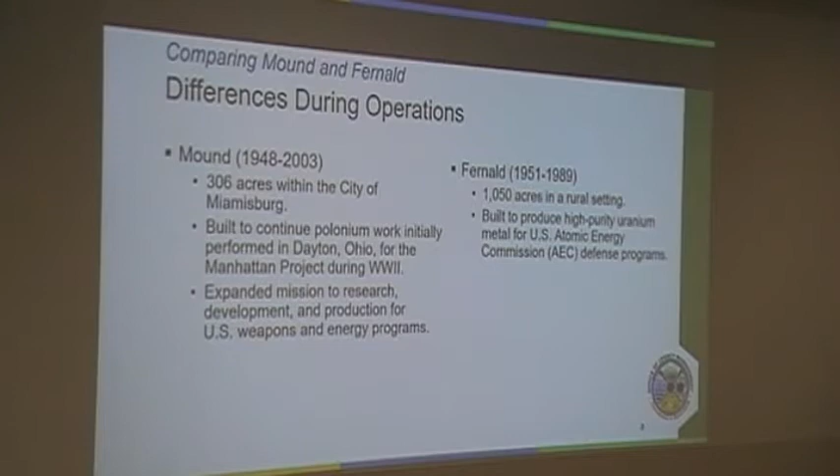Fernald operated from '51 to '89. It's over 1,000 acres, a purely rural setting, and it was a uranium foundry. There were processes to purify the uranium, and then other processes in another part of the plant to machine that metal into various shapes.

These are just aerial photos. On the left, that's Mound—here's the Great Miami River, and the purple is the Mound site. Here's Fernald, and in this photo, this is also the Great Miami River. So both sites actually sit over the same aquifer, called the Great Miami River Buried Valley Aquifer.

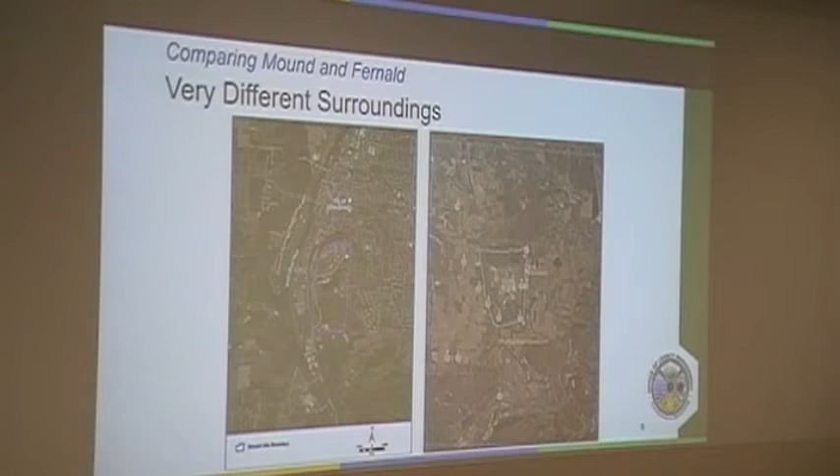During peak operations, there were about 2,500 people who worked here. I remember sometimes you got the last spot in the lower parking lot. Now, what I don't know about Mound is if there were multiple shifts run here—were there multiple shifts? Occasionally, I think, though I don't believe it was standard; there were occasional periods. So 2,500 at the peak, which I believe was around 1988.

This is a shot of Fernald, which at its peak had 3,000 employees, and they were running 24/7—so that would have been 3 shifts.

Back in the 1970s is when the U.S. Environmental Protection Agency was formed. Recall that the first Earth Day was in 1970, and Ohio EPA was formed a couple years after U.S. EPA. Congress passed the Comprehensive Environmental Response Compensation and Liability Act, CERCLA, also known as Superfund, in 1980. The U.S. EPA then created the Superfund National Priority List.

Both Mound and Fernald were put on that NPL list. What that did is give EPA the authority—if they can find the responsible party who contaminated the site—to clean it up. There's a huge public involvement process in CERCLA, and a neat thing about it is that sites are cleaned up to a beneficial reuse: some kind of end state that the local community and stakeholders agree makes sense for the site.

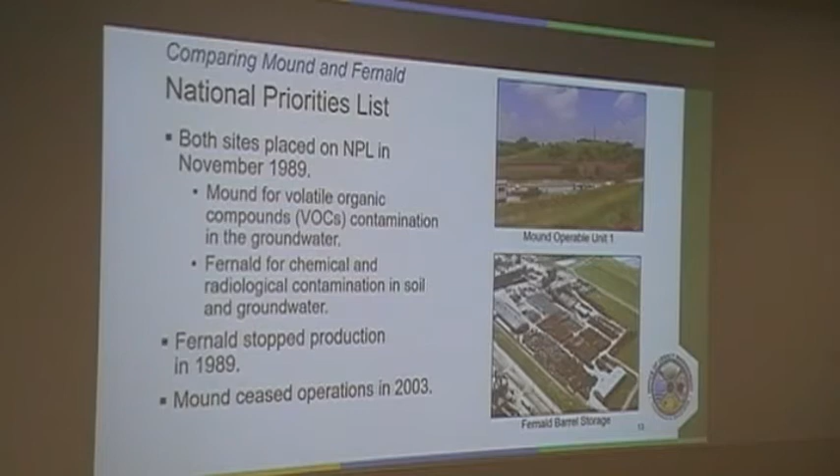Fernald stopped production in '89. Mound ceased operations in 2003, maybe 2002. I know the RTGs left after the 9/11 attacks in 2001, so I think they moved to Idaho in 2002.

So in 1989, this is when big change started to happen. The Berlin Wall fell, and of course that was the beginning of the end for the communist regimes. And eventually the Cold War came to an end, which triggered nuclear arms reduction.

So in 1992, the Department of Energy did what they called a reconfiguration study, and they looked at all the sites across the United States and figured out what missions could be consolidated in certain sites. And what that meant, Mound was going to close, Fernald was going to close too. Now that would be the nuclear weapons production aspect mission.

At Mound there was another big mission happening, and that was the radioisotope thermoelectric generator program that helped with space exploration. So that hung around a lot longer, and I think would have stayed longer if it had not been for 9/11 that made it move to Idaho.

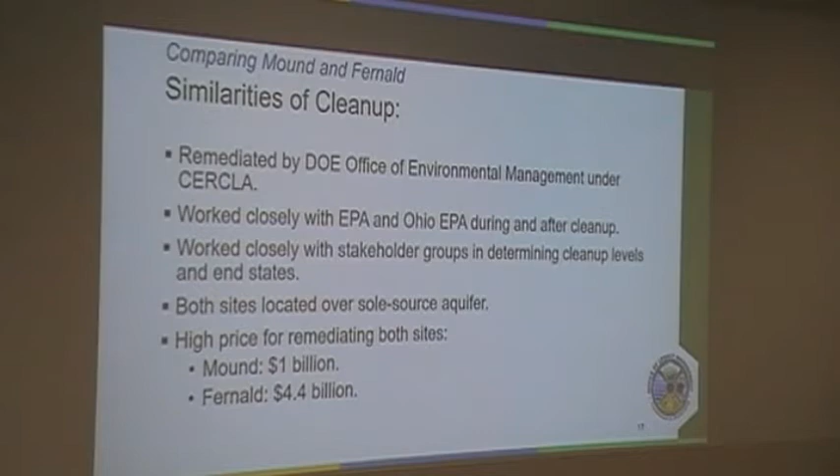Mound was expensive to clean up. It was $1 billion to clean up at Mound, but when you compare it to the Fernald price tag of $4.4 billion, it was pretty cost-effective done here, for very different reasons, the cost differences.

So in terms of the Mound cleanup, the end state was beneficial reuse as an industrial commercial park, and the federal property would be transferred to private ownership. In comparison at Fernald, the end state there is an undeveloped park with an emphasis on wildlife. So undeveloped simply means it's not like a park where you're going to have beautiful concrete bathrooms outside, paved trails, a dog park, things like that.

It also needed to have an educational center, which is today's visitor center there, so that people can tour the exhibits, learn about the site, take advantage of interpretive services programs such as Penny and her staff provide. And with that site, it will remain under federal ownership.

To compare the environmental remedies at Mound, we have groundwater monitoring, pump and treat, currently on standby while we're running a field demonstration of a different technology, and we have institutional controls. So ICs are land use controls that run with the land. They're, for example, included in a deed restriction or an environmental covenant that would be recorded at the county.

We also, some of you may recall, we had what's considered basically a non-CERCLA excavation of the OU-1 landfill. That was completed in, I think, about 2010 when that was finally completed. But what that did, in 1995, that area called Operable Unit 1, which was VOC contamination of the groundwater, had an engineered disposal facility. Well, the department cleaned it up.

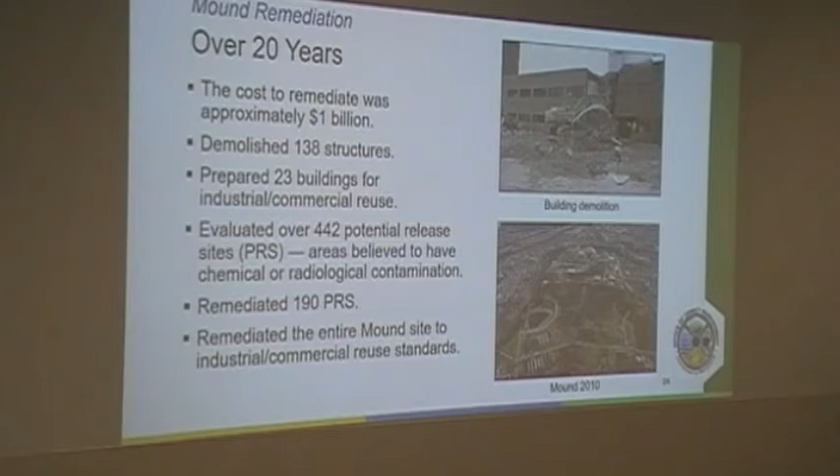Some more pictures of cleanup. We had stacks that needed to be cleaned up — you need to do that under a negative pressure environment. They would start at the top of these stacks and work inside. Upper right, it's hard to see, but there's water being misted while demolition is happening, and that's to control fugitive dust. State law requires that you try to keep dust emissions down.

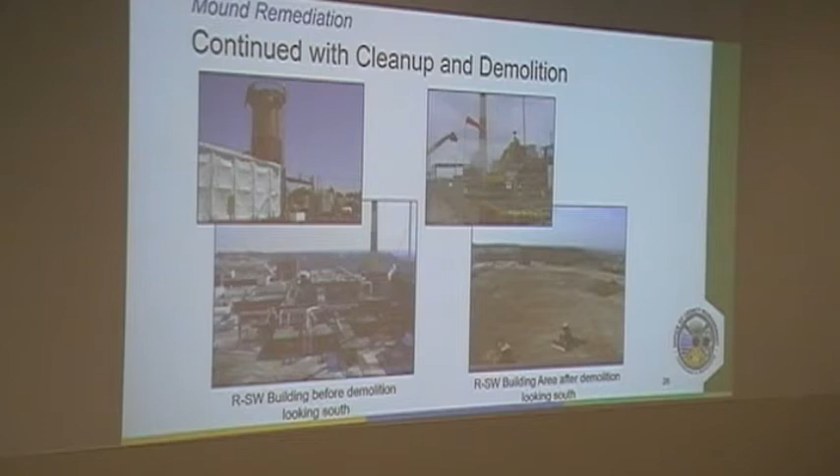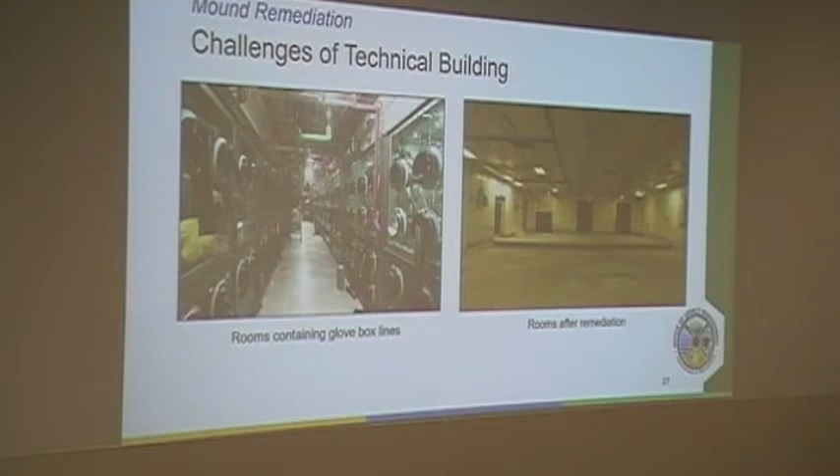Those are simply before and after photos at the bottom of the RSW building. This is T building, which had a whole lot of glove boxes, before and after. You can imagine T building was the very last building that the Mound Development Corporation was able to find a buyer for — they finally sold it last year. So it had been vacant for 20 years, and you can see by the photo why it was very difficult to market that facility.

Potential Release Site 66 was an example of a very, very large — I think it was a $32 million — excavation. It was just a ravine where, over the years, construction rubble or empty drums would be put down in the ravine, dirt was thrown over, and it was a parking lot for many years. But it was a dump. It needed to be cleaned up.

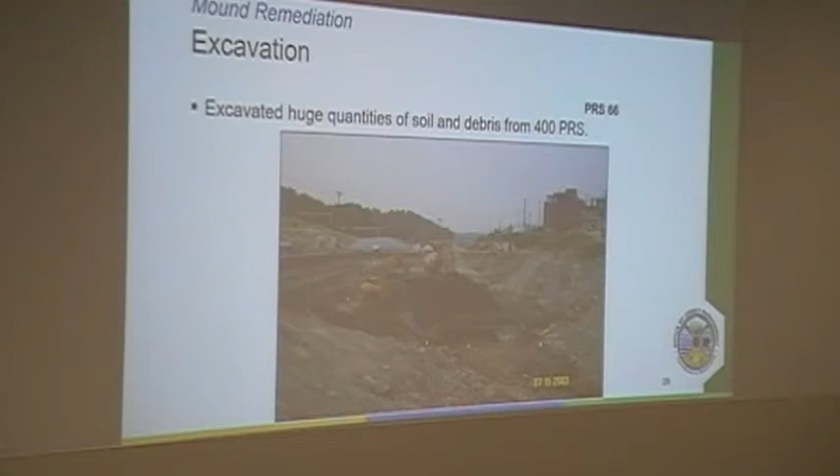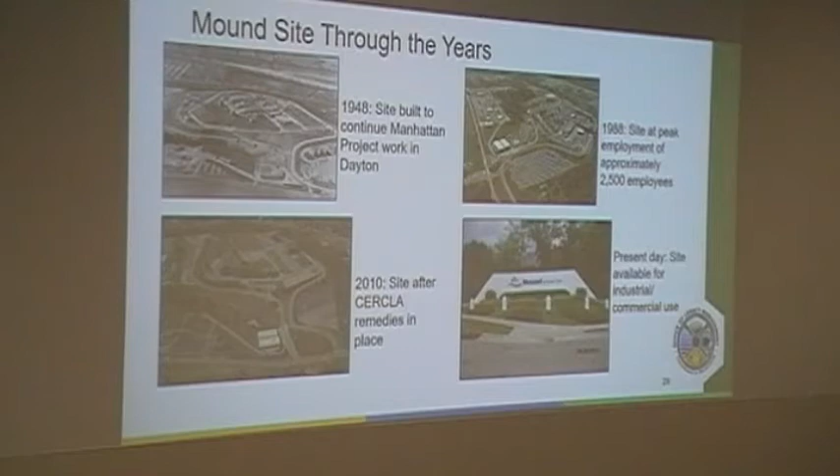So the Mound Business Park is managed by the Mound Development Corporation. Over 95% of the site is no longer owned by the Department of Energy. We would transfer title to MDC, but a lot of those properties they would turn around and sell to third parties. Other property they've held on to and leased to third parties. There's a very small area — the Operable Unit 1 area of the site — that the Department of Energy still owns, and we may be transferring title of that to another third party at some time.

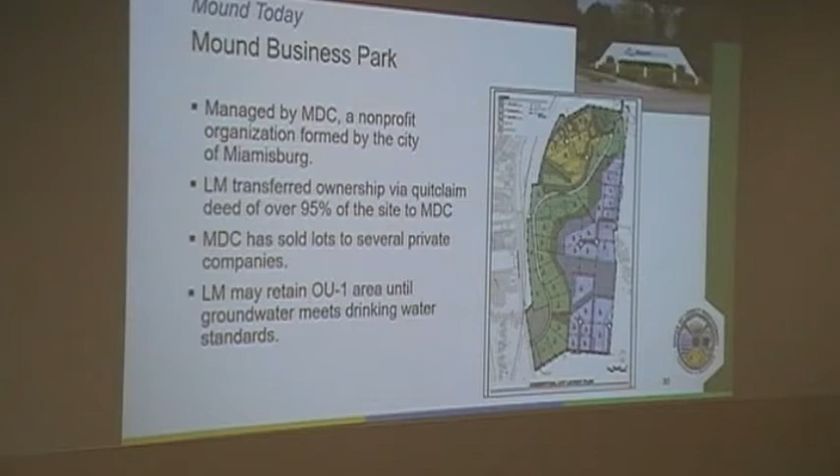Our oversight responsibilities include managing all the CERCLA remedies, and once a year we do an annual site walkdown with the regulators, the MDC, and the City of Miamisburg, to assess the effectiveness of our institutional controls. We assess effectiveness all the time throughout the year, but once a year we have these annual walkdowns where we look to see, okay, has anybody put in a well? Has anybody been excavating soil?

We also go through T-building because there are some institutional controls specific to it. We are still doing groundwater remediation. We maintain records, make them available to the public, and as I said, there's no federal presence at Mound.

We are monitoring the groundwater for VOCs and tritium, depending on the area of the site. We have monitoring wells, and there are some naturally occurring seeps that we also monitor when there's a sufficient amount of water coming out of the ground to collect a sample. We report the results to the regulators, and we produce an annual groundwater monitoring report that we put on the CERCLA administrative record for the public to access.

The institutional controls are listed there. You'll notice the little footnote at the bottom: if a property owner thinks they might want to deviate from an institutional control, they have to ask the regulators' permission. To date, there have been no requests for deviation, although a couple days ago I did get the very first request, and we're going to start taking a look at that in core team.

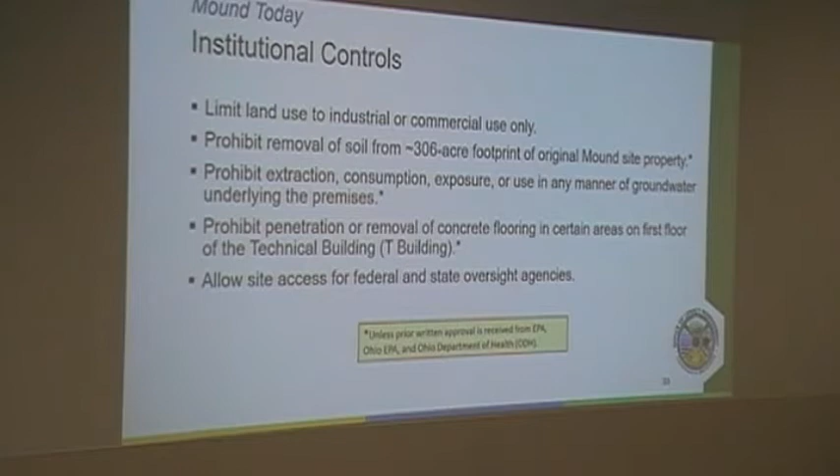So you can't remove soil from the 306 acres. You can move it around wherever you want to, you just can't remove it. You can't use groundwater for any purpose. And as I said, in T-building there are some additional institutional controls—you can't penetrate or remove flooring in certain areas without the regulators' permission.

Part of the annual walkthrough we do isn't only physical inspections—we review a lot of public records, Montgomery County real estate records. We go to the City of Miamisburg and look at their permit applications. And we talk at least once a year with property owners here, go over the ICs, make sure they understand them, ask them, hey, do you have any questions? That has proven to be a very effective method.

I believe this is the last Mound slide. A really neat thing about Mound in terms of institutional controls is that there are multiple levels of ICs. The CERCLA records of decision are the legal driver for the institutional controls, or in the case of Parcel 9, there is also an environmental covenant.

When the MDC subleases property to business park people, they verbatim put those ICs inside the subleases. Same goes when DOE would issue a quitclaim deed to MDC. MDC also has what are called limited warranty deeds—so if they're not leasing property but selling property, they do what's called limited warranty deeds.

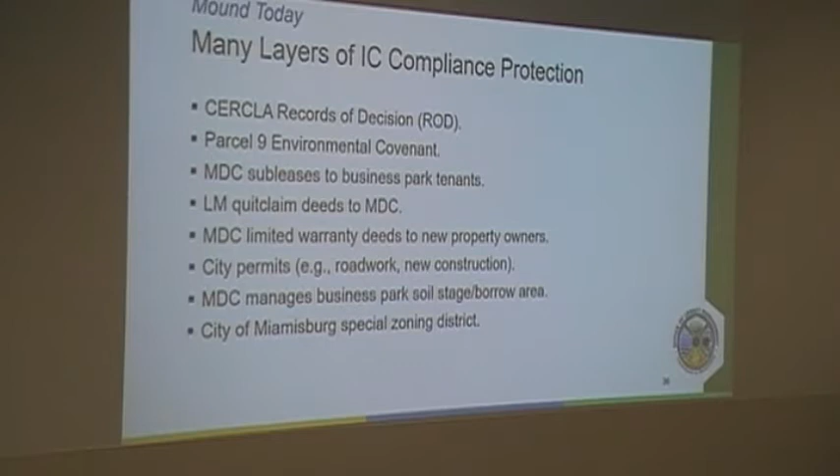MDC also manages a soil staging and borrow area. Again, that's because you can't remove soil from the site, but you can move it wherever you want to, so they do that as a convenience for the business park tenants. The city just passed a special zoning district for the Mound Business Park—I believe that was in January—and we are starting the rezoning process right now, which also lists the CERCLA institutional controls.

So moving forward, we're going to keep on groundwater monitoring and reporting until drinking water standards are met. The entire site will eventually be privately owned. We're going to have to continue educating new and current property owners on the ICs, and continue to interact with the public, stakeholders, elected officials, etc. It's a little bit of a challenge sometimes to manage a site with no on-site presence—I can't look out my office window and see what's going on here like I used to be able to do 15 years ago.

I just got a kick out of the kids. It's easier to put up a sign that says no fishing than one that says recreational use prohibited. It took about 15 years for that to click.

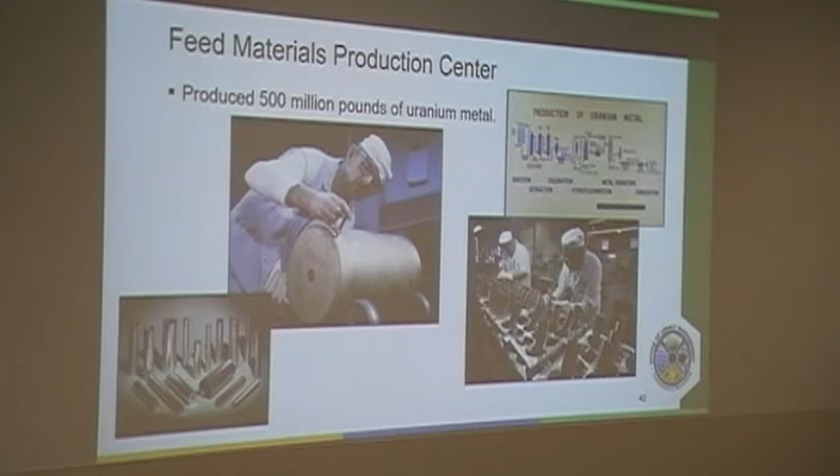These are just some examples of the machining that was involved, to specific standards. Some of these things are called targets. They're like tubes that were put in reactors at Savannah River and Hanford as part of nuclear weapons production.

So at Fernald, unlike Mound, instead of doing the little removal action authority where you go after little pieces of contamination, they did a 10-year remedial investigation and feasibility study. Remedial investigation is when you're trying to determine the nature and extent of contamination, what contaminants are out there, are they in the ground, the water, the air, and at what levels. Then the next step is a feasibility study where you determine what you have to clean up and what technologies are available to clean up those contaminants.

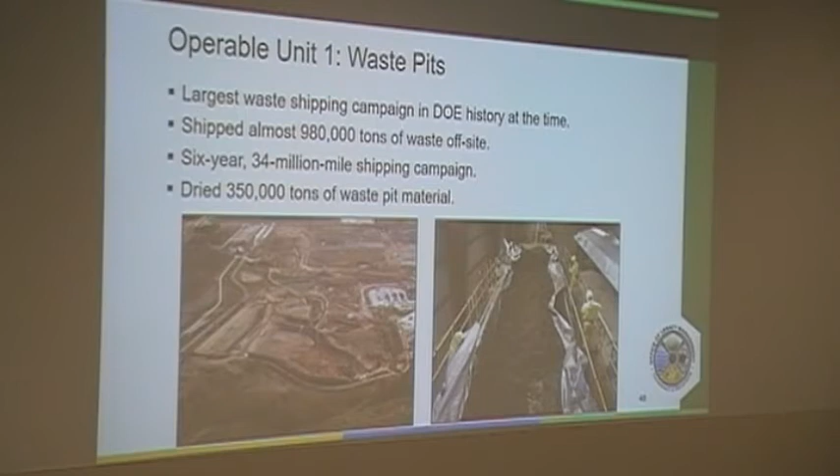Operable Unit 1 was an area known as the waste pit, the largest waste shipping campaign in DOE history at the time. You can see how many tons we had to ship off-site. All of that waste had to be dried, and it took 6 years to get it all shipped off-site.

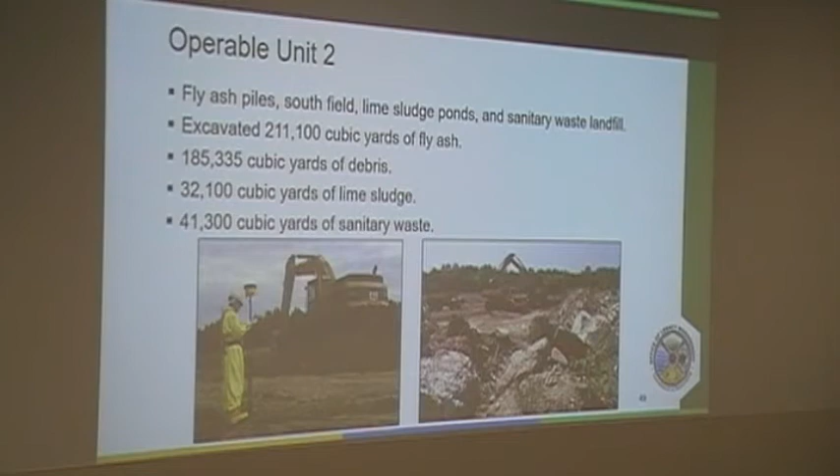Operable Unit 2 was kind of a mishmash of contaminated areas across the site. You can see that in the first bullet. Again, it was a large excavation project.

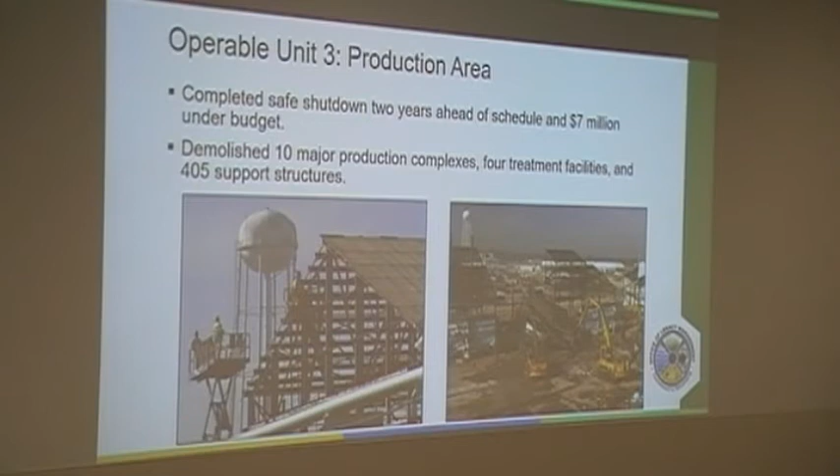Operable Unit 3 was the big one - that was the production area. There were 10 major production complexes, 4 gigantic treatment facilities, and 400 support structures. That took years and years to accomplish.

Operable Unit 4 were the silos. There were 4 silos on site - one of them was never used, but silos 1 and 2 had uranium ore from the Belgian Congo, which was a huge source of radon on site. For those 2 silos, everything was stabilized, and we did truck shipments for that, which also went to an off-site disposal facility.

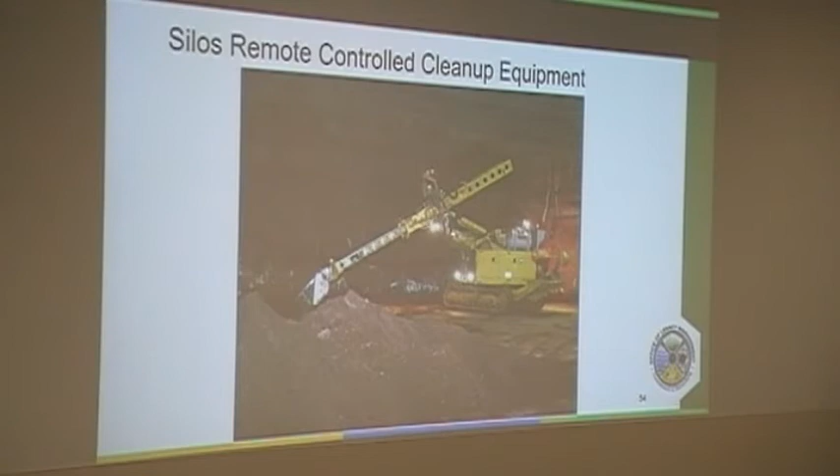This is just a photo inside of one of the silos, because the removal of the waste inside was done robotically. That's just a shot from inside.

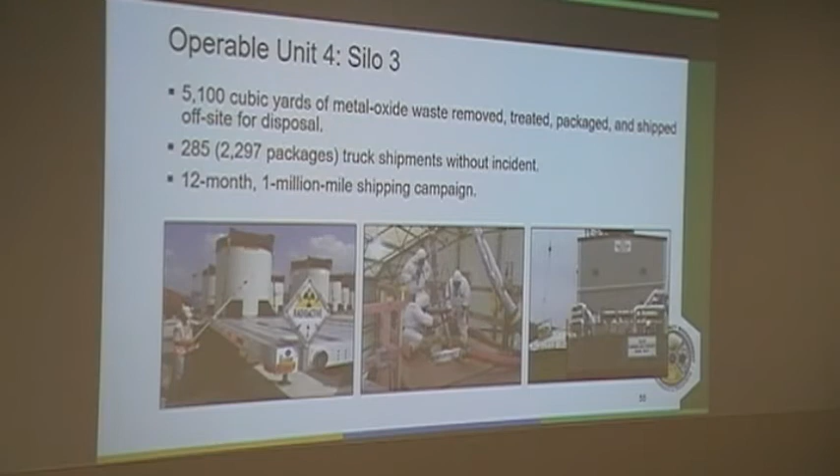Operable Unit 4 also included silo 3, which had a metal oxide waste, so it wasn't as nasty as the waste in silos 1 and 2. But again, those were truck shipments - a 1 million mile shipping campaign. In 2002, there was a big celebration when the last truck left the Fernald site.

Operable Unit 5 was the groundwater and the soil. We started out remediating 196 contaminated acres of the Great Miami Aquifer - that was the estimated size of the uranium plume. Over the years, that plume has reduced in size because we've been pumping and treating. A small part of that plume was off-site and is still off-site, but it has shrunk considerably. We're cleaning that water to EPA safe drinking water standards.

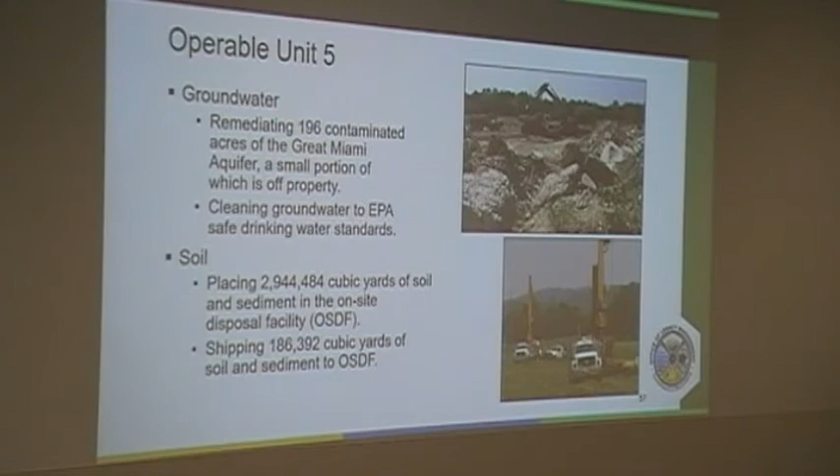The soil and sediment removed during remediation was placed in the on-site disposal facility. What you see in the lower right photo is monitoring wells or extraction wells being installed. The cleanup headlines actually started to get a whole lot better than they were years and years ago - they started to be positive.

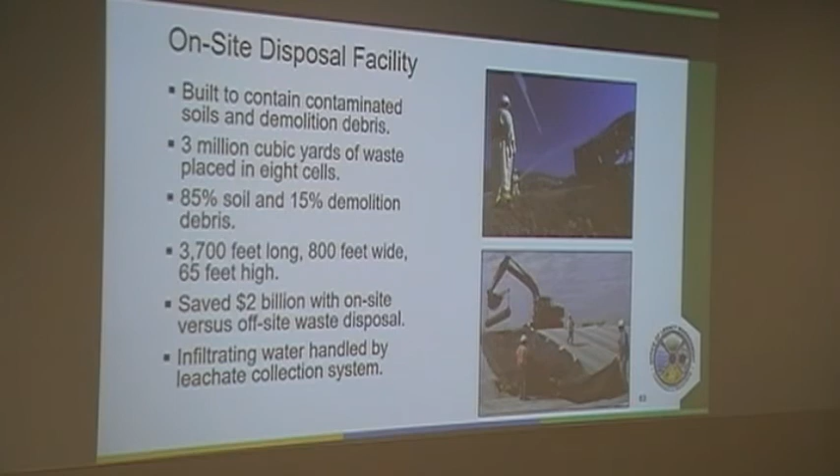That's the photo, sorry Penny. The one there on the bottom is where they have finished putting waste into the cell, and they're laying down a geosynthetic liner or two, and then dirt gets put on that and grass on top of that.

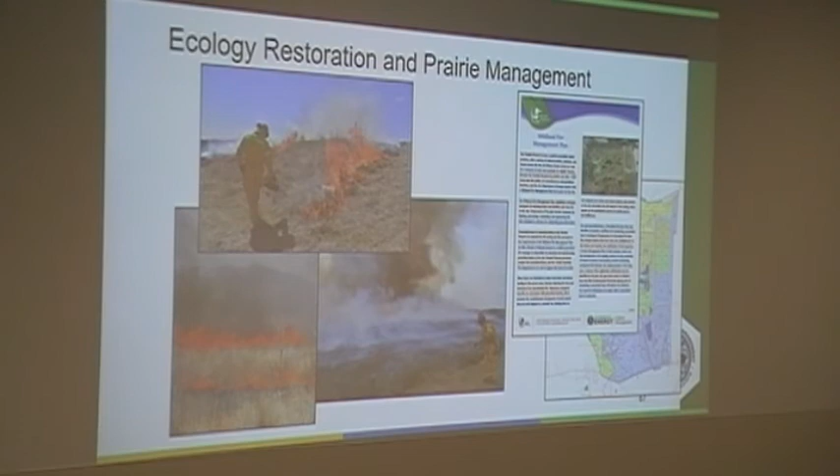One of the things we do is maintain the ecologically restored areas. We use controlled burns to manage the prairies, which is a great way—it's the way Mother Nature manages prairies—and that includes the grass on top of the OSDF, because you don't want woody vegetation growing on your OSDF. You want to be able to see that the cap is still in place, there's no slumping, no gopher holes, and burning is a great way to do that.

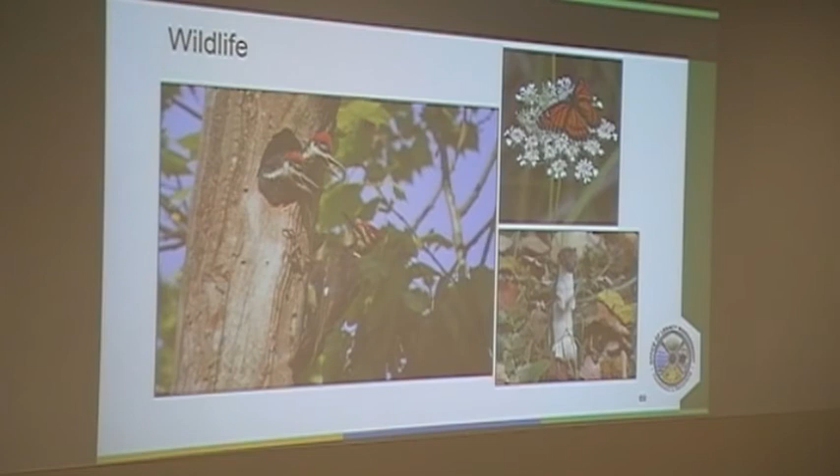Monarch butterflies—we tag monarch butterflies. That's a weasel down there. Those are pileated woodpeckers. That happens to be a photo taken by a bird watcher who came to the site, and we got their permission to use the photos.

It's kind of gross—the way it works is the zoo breeds males and females, brings them to the site along with a bunch of dead rats. We go out and drill holes, dump the rat in, then dump the male and female in, gently put some dirt on top, and leave them alone. Then we come back in maybe about three weeks, and the zoo carefully pulls the dirt out to look for larvae of the beetles.

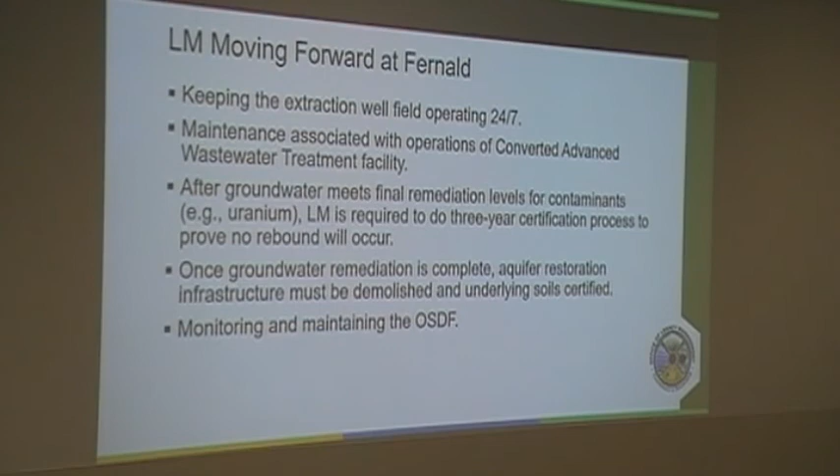We also need to continue managing some of the prairie communities through controlled burns, including on the OSDF cap, monitoring and maintaining some of those areas. For example, we go out and monitor amphibian populations.

We are also ensuring all the site amenities and interpretive services are maintained and refreshed. The visitor center and the hiking trails are inspected once a week to make sure there's no slips, trips, falls, hazards. Fencing gets damaged, signs get damaged, those sorts of things. A huge part of the mission is ensuring future generations remember what the Fernald site history was, and that it also remains a community asset as an undeveloped park, with an emphasis on wildlife.

So, in summary, both sites were cleaned up to EPA standards under the CERCLA process. Ohio EPA and US EPA continue to oversee work that the Department of Energy performs at the site. Local communities are very much involved in cleanup decisions. Both sites are protected with human health and the environment in mind, and are great examples of beneficial reuse, considered assets to the communities.